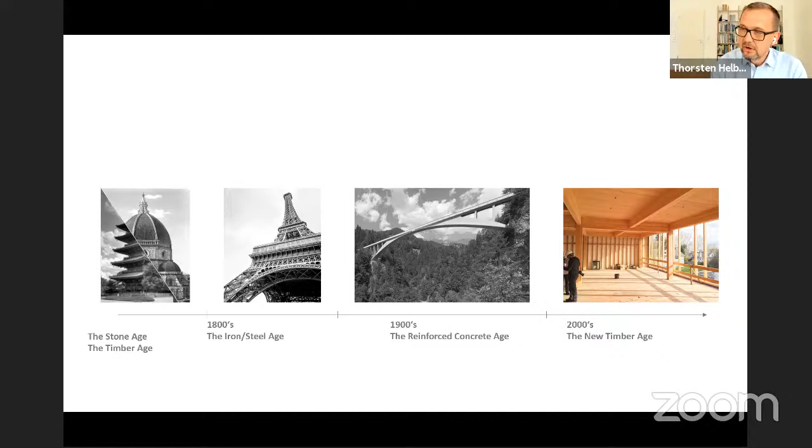And I claim, and we claim, that since the 2000s, the 21st century will be the new timber age. And I will talk about this now.

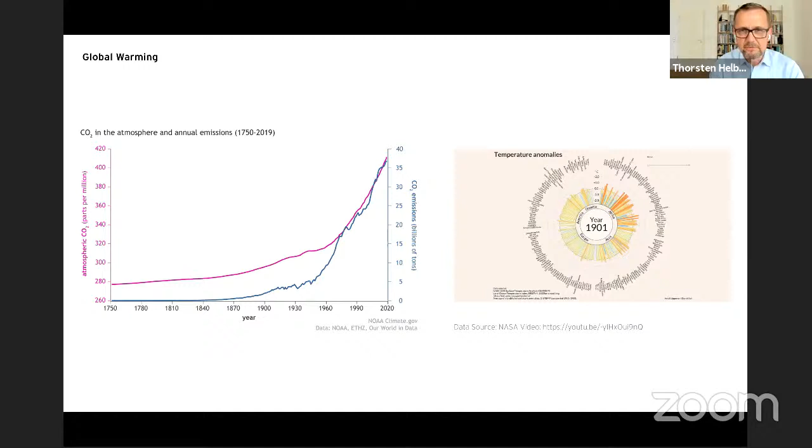So why do we work with timber? For sure, because of its strong sustainability aspects. I don't have to talk too much about this - everybody knows the global warming effects caused by CO2 and other emissions, especially since industrialization started 200 years ago. What we can already see are these global warming and climate change effects affecting all regions of the world, and we will see more of these effects in the next decades.

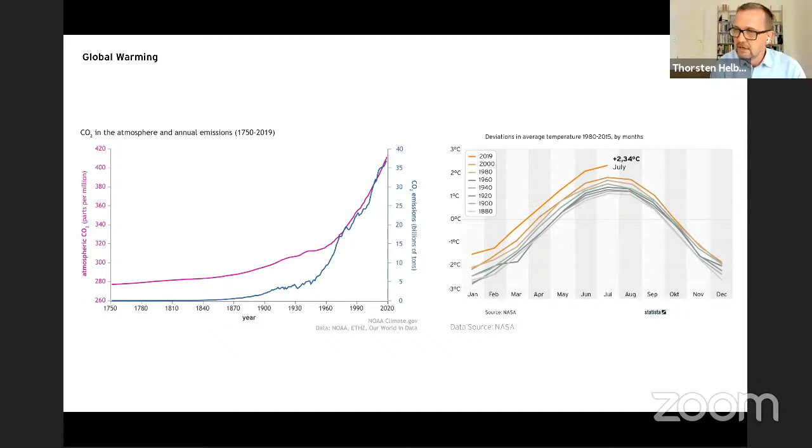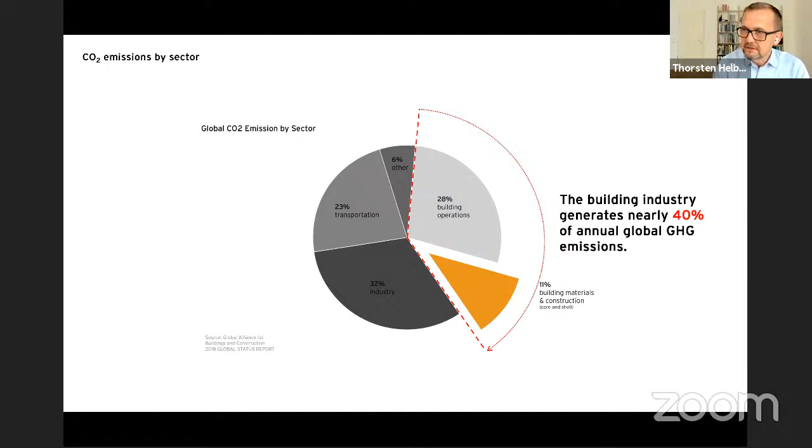When you think about the building industry, about 40% of annual global greenhouse gas emissions are caused by the building industry. Of this, 72% is caused by building operations - that means cooling, heating, and so on - and 28% is embodied carbon, the emissions caused by producing the materials we use for buildings. In Europe, we now think about 2045 for going down to zero carbon emissions, but that mainly addresses building operations.

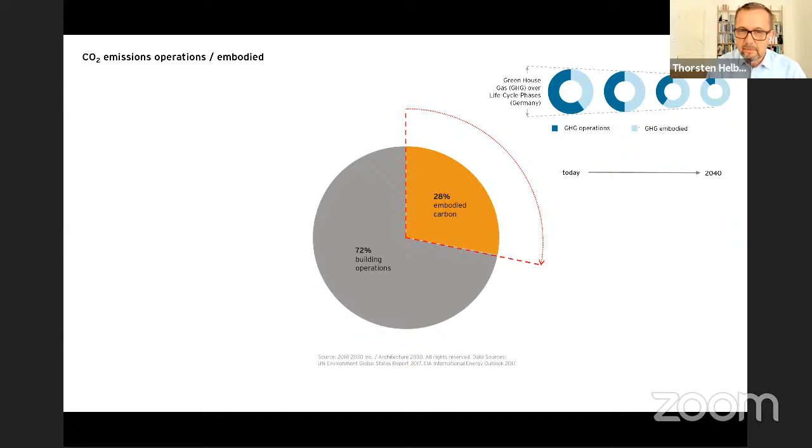But the material we use now will stay for much longer. That means the gray emissions we produce now with our materials will remain for a much longer time, even if we manage to use renewable energies for cooling and heating operations. So the aspect of material gets more and more important.

When you look especially at the division between structure and fit-out, or interior and MEP components of a building, about 56% to 60% of this embodied energy, and with that also the gray emissions, results from structure.

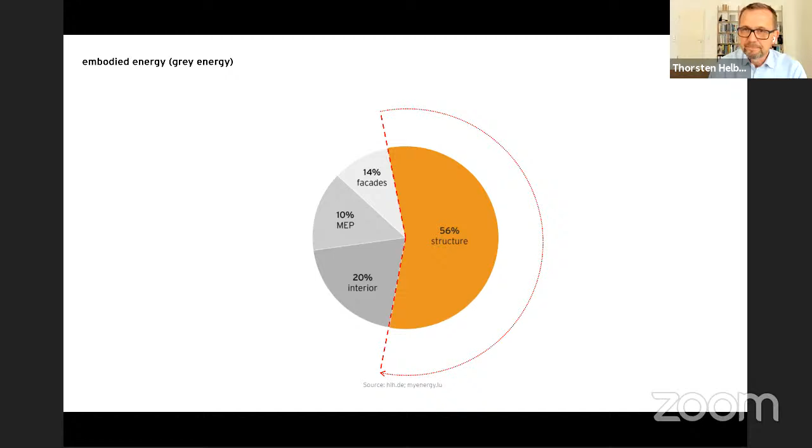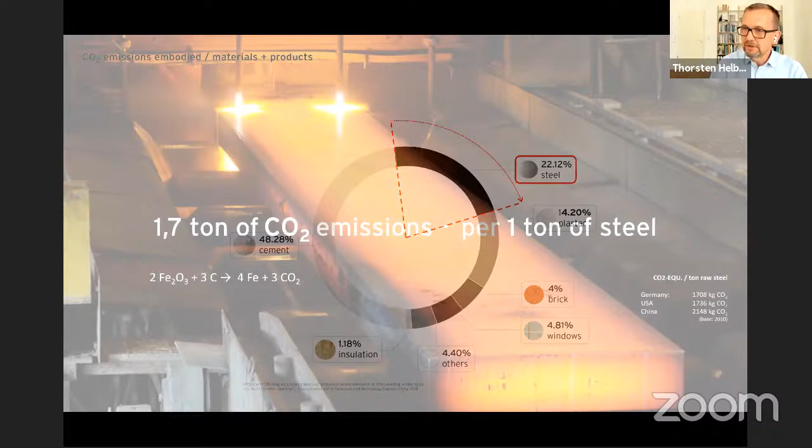And when you look even closer to understand what causes these emissions, you see that about 20-22% of these emissions are caused by steel used in buildings - that's a very general approach - and 48% is caused by cement.

So when you think about steel, it's a very simple formula you can look up in a chemical process. About two-thirds is the chemical process and one-third is the energy consumption during this process. At the end, you emit about 1.7 tons of CO2 per ton of steel - that varies a bit depending on whether it's in Germany, the US, or China, but that's roughly the number.

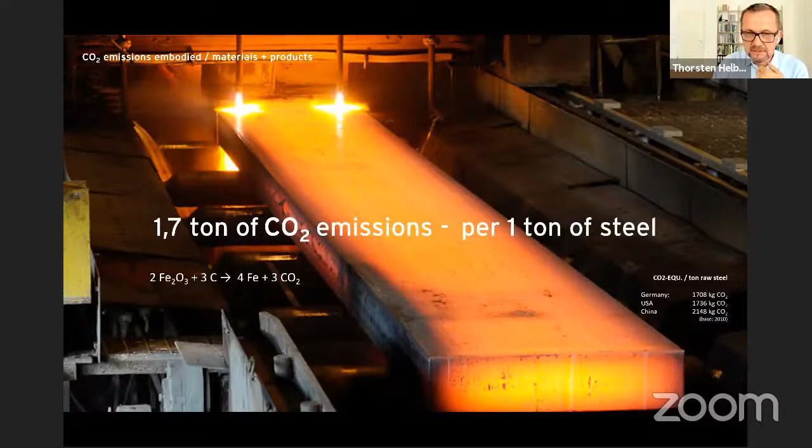Same for cement - about one-third of the cement emissions cannot really be avoided because it's due to the chemical process, and the other two-thirds are caused by the high energy demand needed to produce cement. About 0.8 tons of CO2 are emitted to produce just 1 ton of cement.

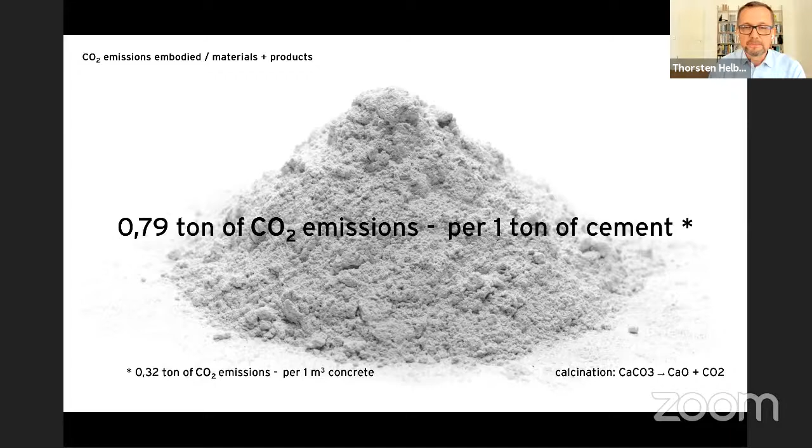So what could we do? To reduce these CO2 emissions, we could use a material which doesn't need to emit CO2 during production, but even absorbs CO2 during production. We could use timber.

What you see here is a simple formula we should all know: oxygen photosynthesis - how trees create material. They use CO2, water, and sunlight, and with that create the substance of a tree. There are simple numbers for how that works: 1 ton of CO2 is stored, or sequestered, in 1 cubic meter of timber, meaning in 1 ton of timber material, 2 tons of CO2 are sequestered.

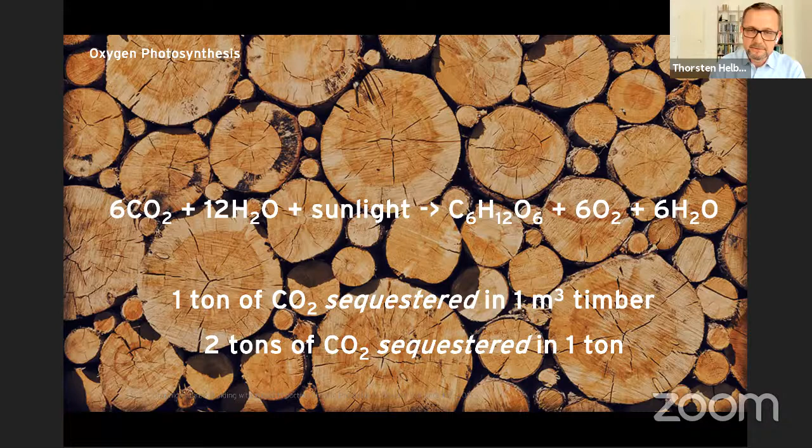Do we have enough material? Yes, we have enough timber in the world - about 30% of Earth's surface is covered with forests. This is a number we developed for our students in New York, showing how many hectares in the world are covered by forest - 4 times the US land area. Especially in Africa, mainly the Central African region and East Africa, we have enough sources for timber production. I've written down the numbers for Germany.

32% of Germany are covered by forest, but 52% of Tanzania are covered by forest. What is very important when you think about the production of timber, which we would look at now for a forest, is that you have to have a sustainable forestry. That means in all those countries, you can see on the right-hand side, the forest growth is larger than the harvesting of the timber, than the forest production. And that's very important. So to have a sustainable forestry, we would grow more trees than we would harvest.

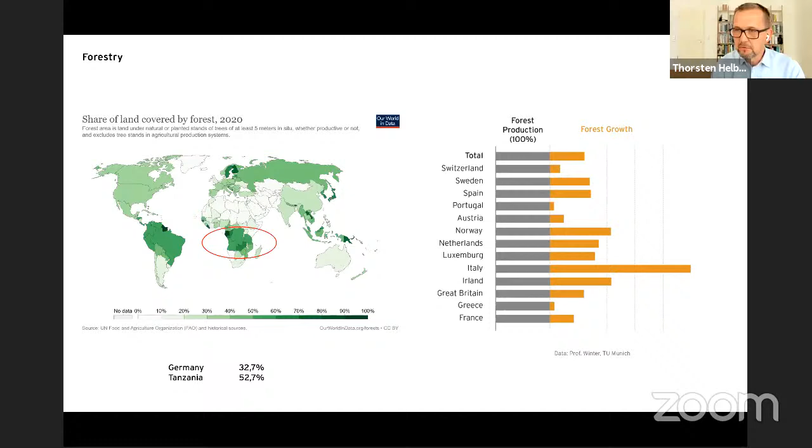Okay, now we have our raw product. We have timber. And what do we do with that? Now I want to talk about timber technology. In the past, we used timber more or less like this, like simple cut beams and planks.

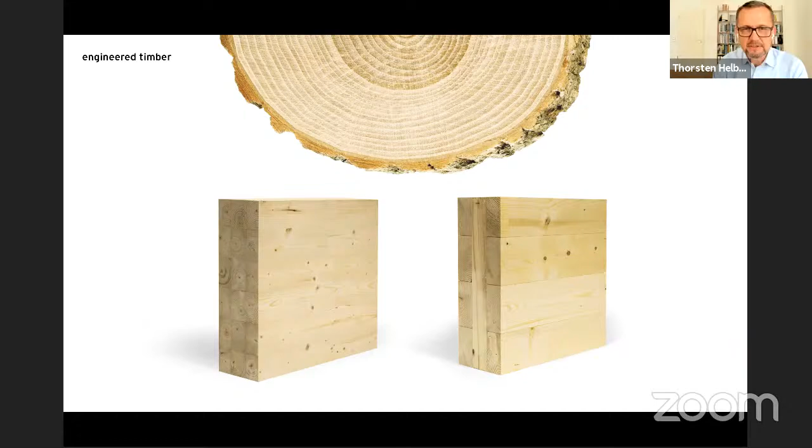In today's times, we use engineered timber, and engineered timber is mainly a product which tries to mitigate or reduce the typical weaknesses of a timber product, and we can see it on the next slide.

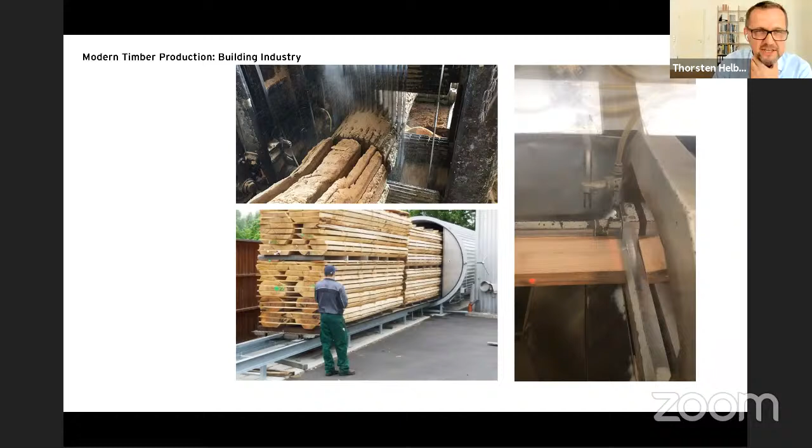What you do there, you take out the knots, the typical spot where a branch would grow out. In a tree, there's a kind of a small failure, so to say. And when you use the timber, you produce more or less endless planks, and you take out these mistakes, these little knots, and then you rejoin these pieces together. What it does is create an endless strip of homogeneous material, homogeneous in terms of parallel to the fiber.

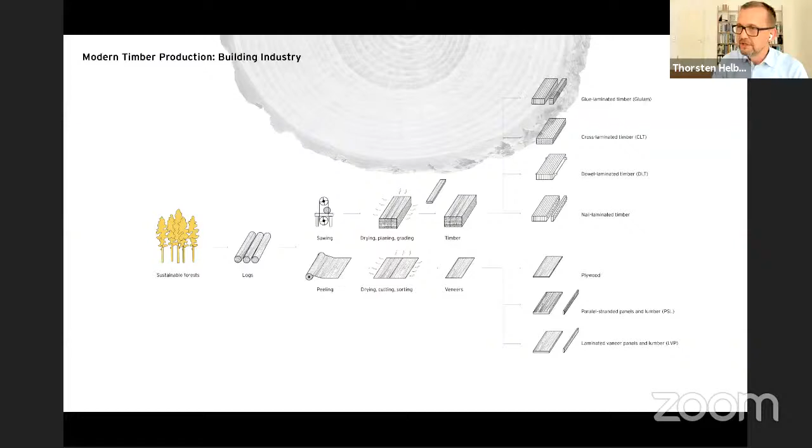And with that base material, you can create a lot of interesting timber products for an engineer. There are many applications, and the most common one, which we know already for about 100 years, is glued laminated timber.

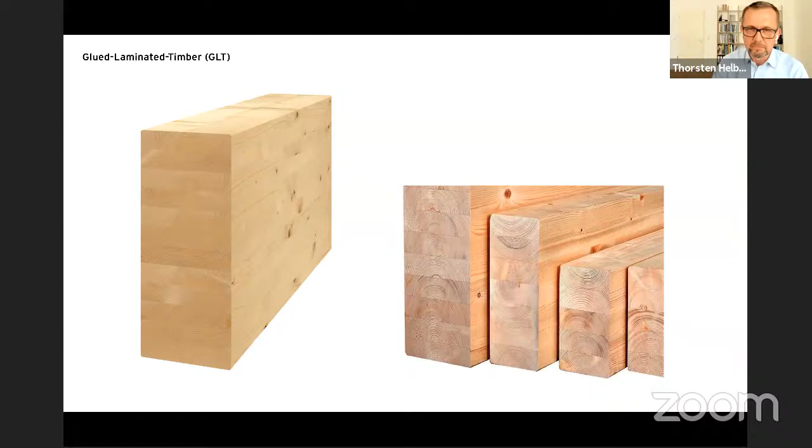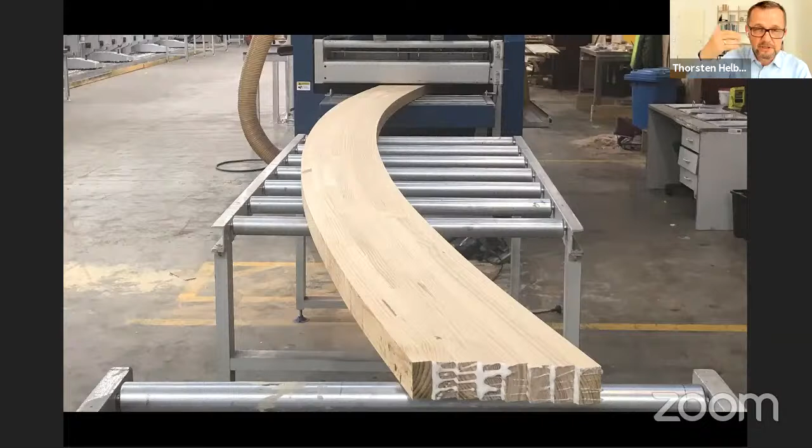That means we would glue several layers of timber together and create one uniform and more robust building component. You can bend this, you glue it together, and with this gluing process you also make sure that even if in one plank, one layer, there's a little weak spot, the other layers could take over. That means it's more of an industrial product in a way, but also more reliable than just a raw or cut out piece of a tree.

I think you all know this already, these typical glulam beams, which have been used a lot in the last 30, 40 years. You can see this in many applications already.

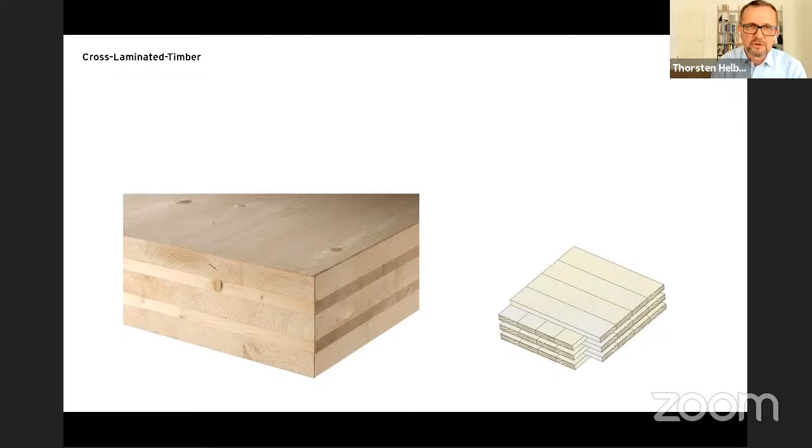The new thing, the interesting thing for an engineer to use in a structure is cross-laminated timber. Cross-lamination means it's not just oriented in one direction, with each fiber parallel, but you have it in a cross-laminated arrangement. And that creates a different and very interesting product.

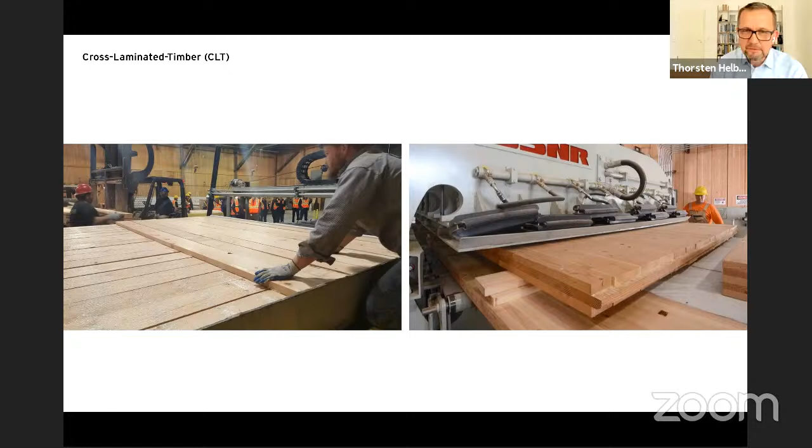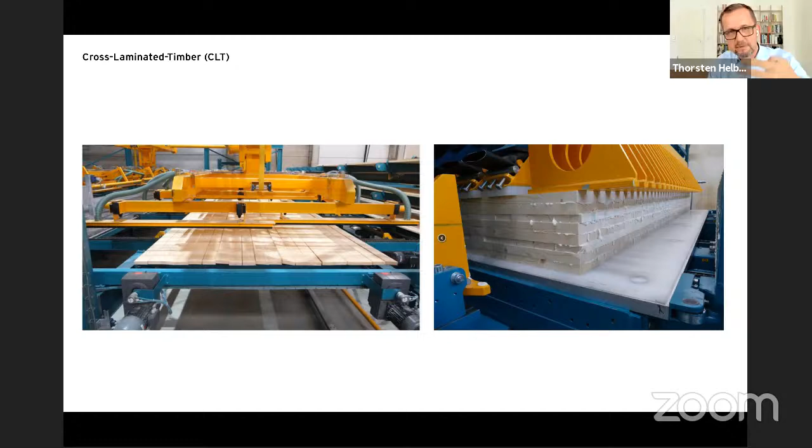Before I show you the advantages of this product, I'll show you how it's made. In today's time, this started about 20 to 25 years ago. It's now a fully automated process where robots and CNC technology have taken over, making it a very much industrial product.

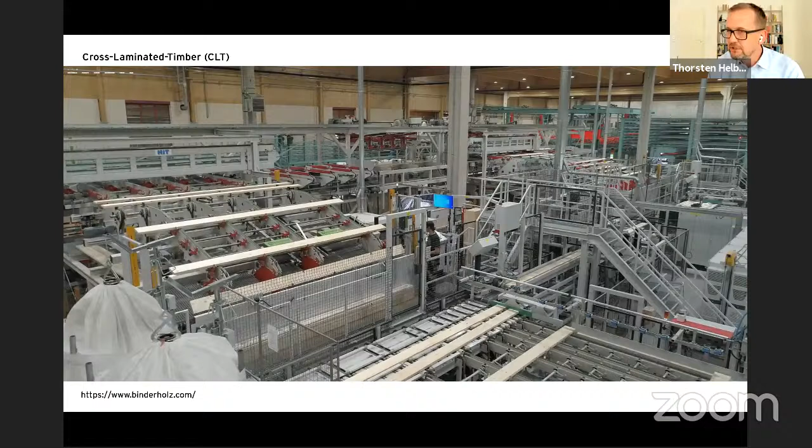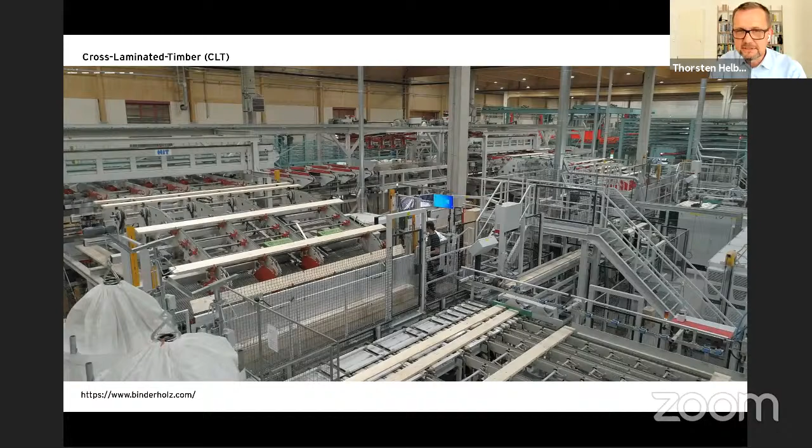I've taken screenshots from Binderholz's production line. You see here it's fully automated and controlled by robots, and that means the quality control and the assurance that you create a certain precision in this process is very high.

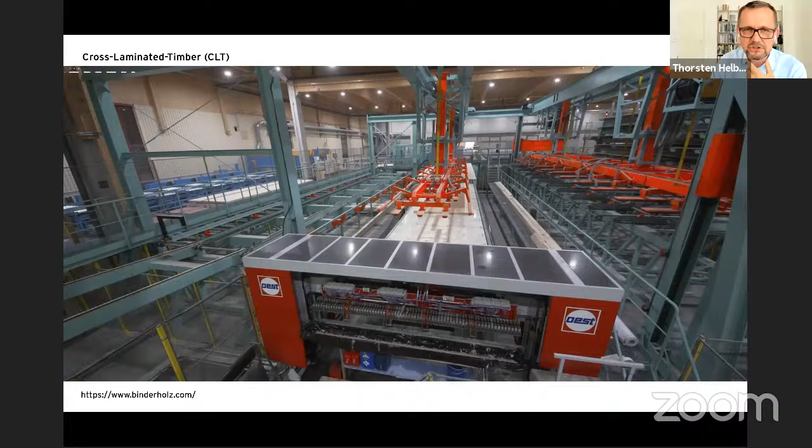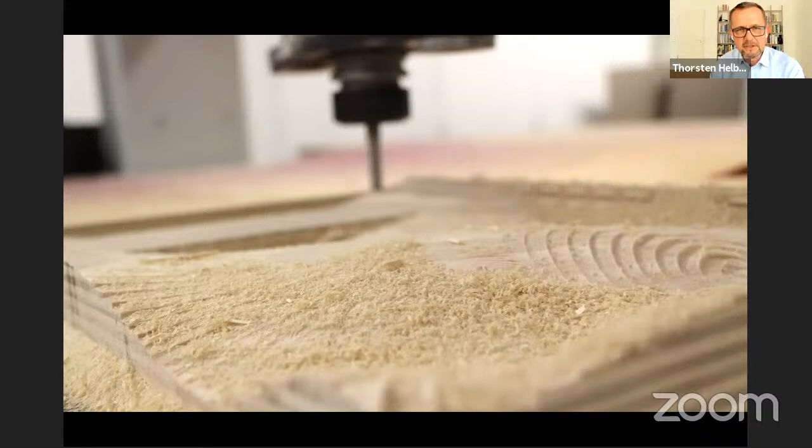Once you have created this product, which is an assembly of cross-laminated single planks, it's one uniform block, and you can then treat this block with the now available CNC technologies. That means you can cut, saw, and treat it in every possible way.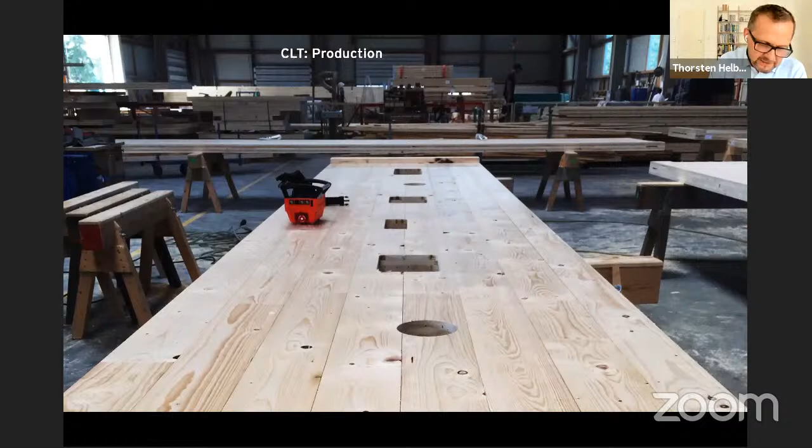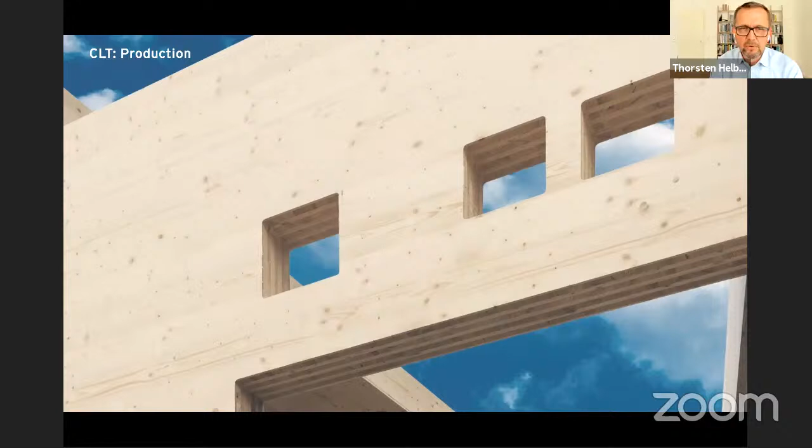What is the advantage of this? As in today's steelwork industry, you can work with very high precision. Each hole, each routing for piping and so on is very precise in its location. That means you can prefabricate components already in the workshop, and you don't have to adjust or recalibrate on site anymore. That takes away a lot of risk you would typically have on site, and makes the whole installation process much more smooth, easy, and risk-free.

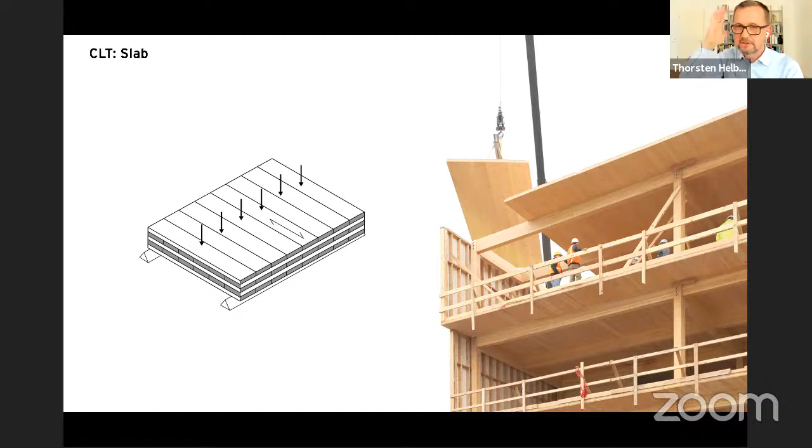Structurally, it's important that it can be used as a slab, a two-way spanning slab. Engineers would say it can span both directions, not just in one like a typical beam, but it can span in two directions, like a concrete slab which is steel reinforced.

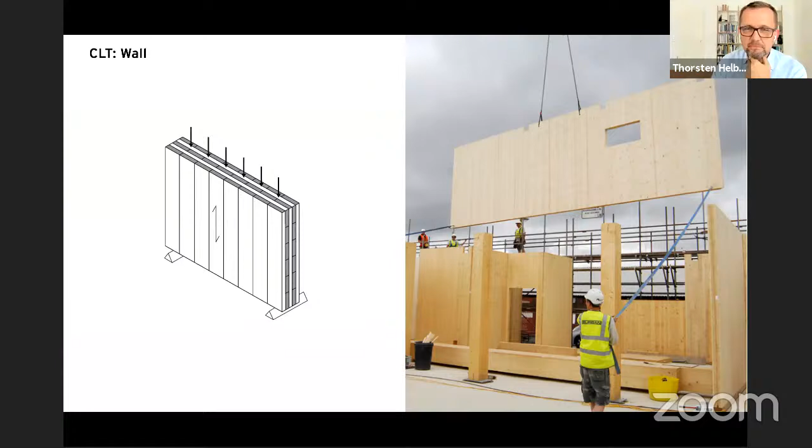But also you could use it as a wall system, because it has this cross-lamination. It means it's also, engineers would say, shear stiff, and that means it can also be used as a prefabricated and load-bearing shear wall system, even as a core system, so to say.

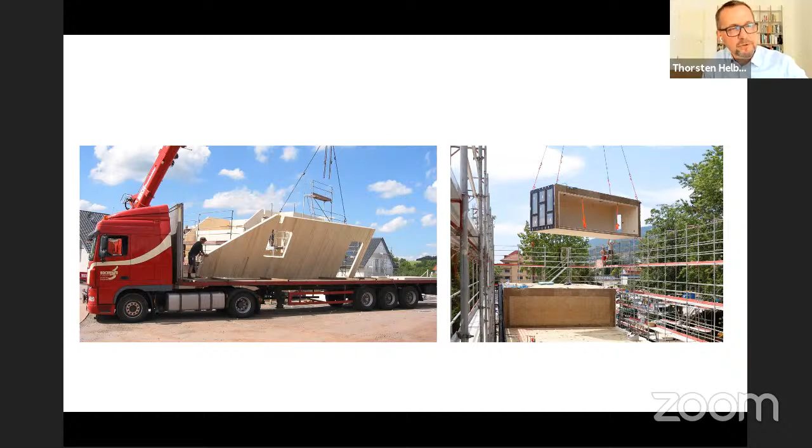So what about the typical things we have to talk about when we talk about timber? Timber and water, for sure. Timber is not like steel, it cannot corrode, but we have to make sure that even if the timber comes into contact with water, we control this. I don't want to go too deep into the theoretical aspects of this, but here's an interesting, very microscopic view of timber.

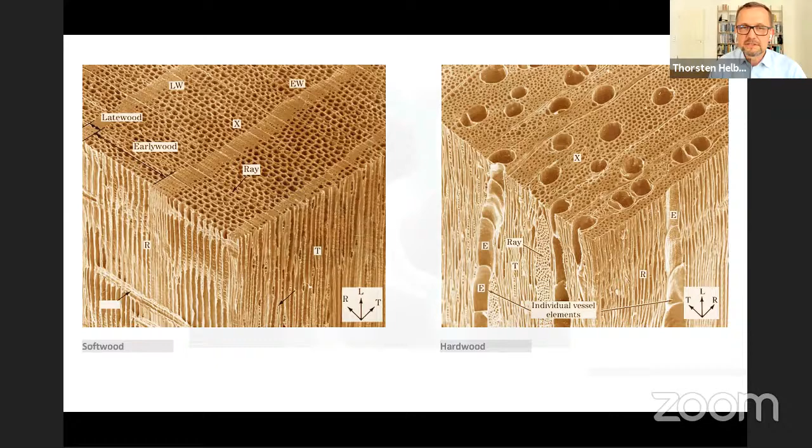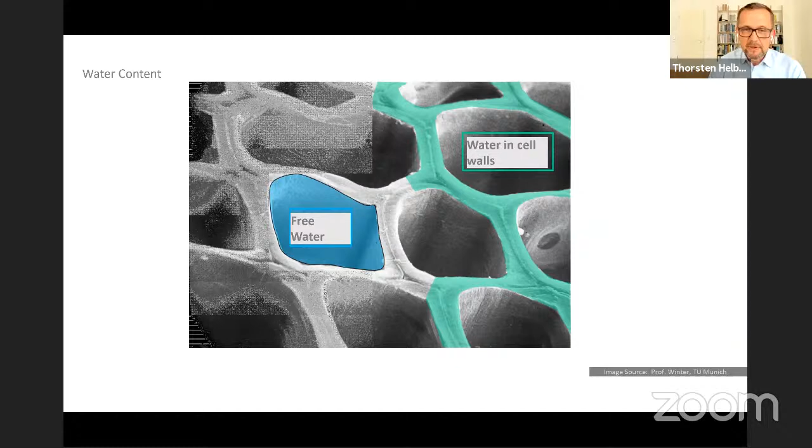How do you do this? It would mainly happen if you directly expose the timber to rain and to constant humidity. So there are rules to avoid this, and also you have to control condensation effects. So you have to be careful with timber, but it's absolutely manageable.

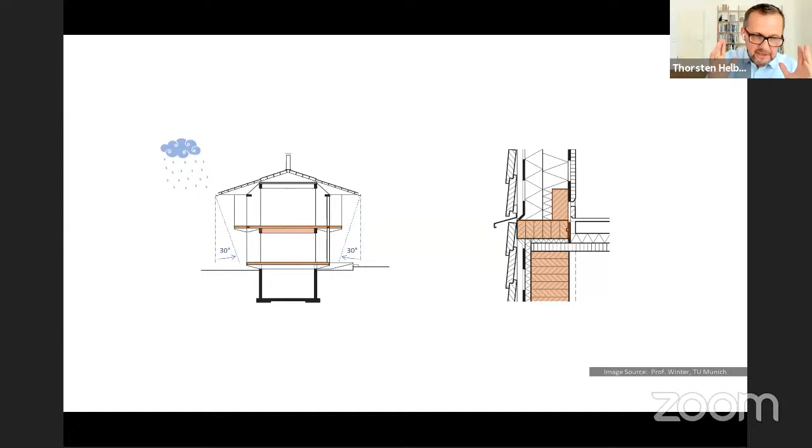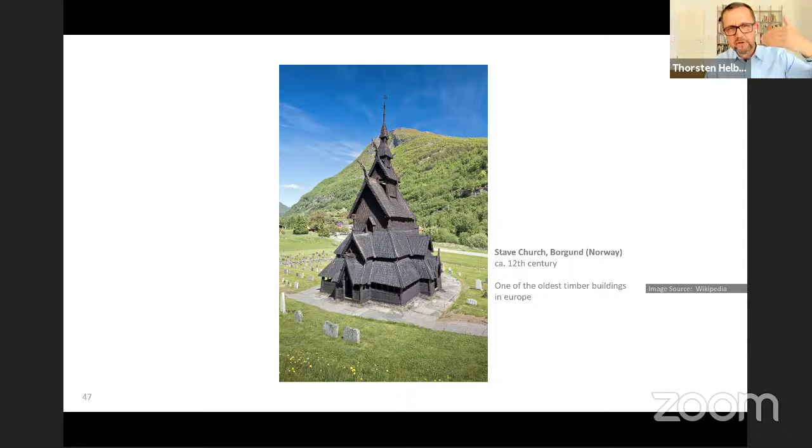I want to show you an example. There are buildings 700 to 800 years old already in the world, because in ancient times they knew about timber, maybe more than we know now, because they knew how to protect it and how to maintain it. In this stave church in Norway, built in the 12th century, they understood that they have a facade and a roof which needs to protect the inner primary structure. And that's the inner structure.

Since there's no water which comes inside the building, this timber structure can last more or less forever. This is now centuries old. You have to replace the facade if it's just timber shingles, but you don't have to replace the primary structure, because it's protected. There are other buildings, like half-timbered houses in Europe, which are 300 or 400 years old, and there's no degradation.

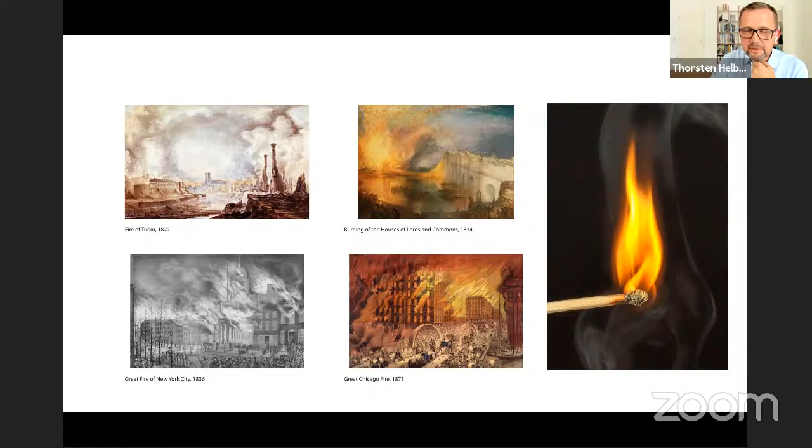Timber and fire. For sure, timber is combustible, as we all know. We all know these stories from the past where huge fires in big cities created huge damage and losses. So the interesting aspect of timber is, yes, it burns, but it doesn't lose strength in the part which is still intact. That's a difference compared to steel, because steel loses its strength due to heat, and it would bend more and more. You see this example comparing a primary structure out of timber and one out of steel.

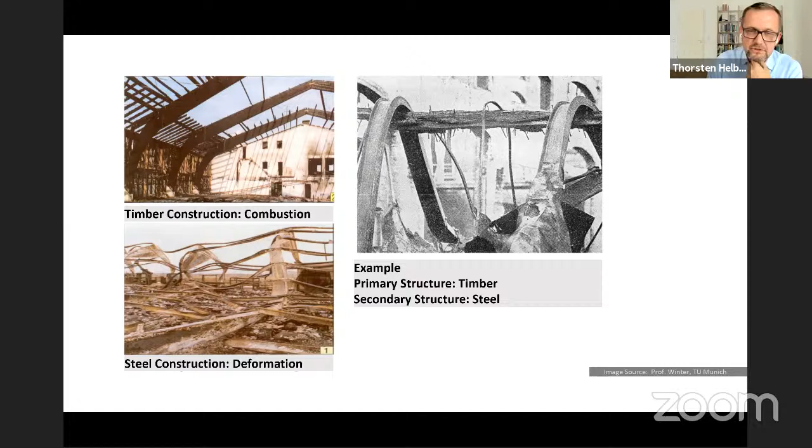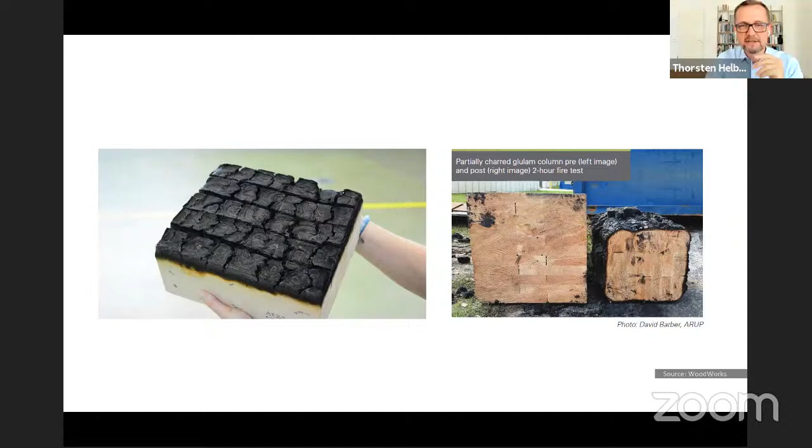What we hear from our fire brigades here in Germany and in the US is what they like about timber: they can actually see what is happening. You see what is burning, and you can imagine that there is still some remaining structure there. Especially with this mass timber approach, where components are bigger and more massive, you can easily calculate how much of the bearing member would still be there after a certain burning time. So we now calculate, and this is code in many states and countries already, for 30, 60, or 120 minutes, how much of this cross section would remain intact.

That's very interesting. This approach is now the code base for many countries already in Europe, but also in North America.

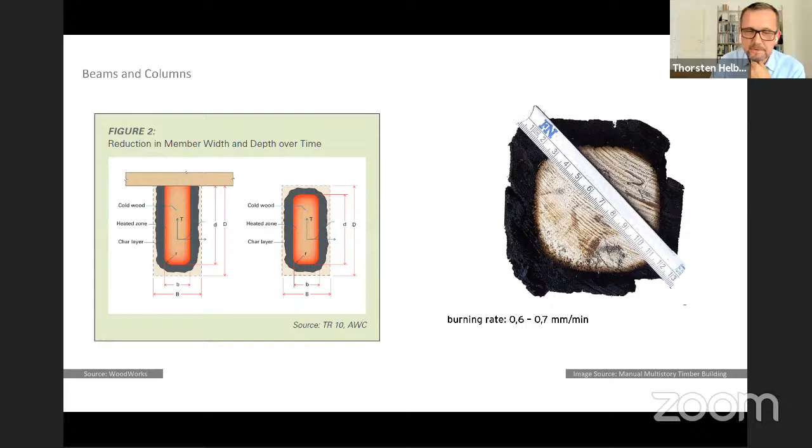That means the heaviness, the solidity, or having massive members helps a lot to increase the fire resistance of a building. You can imagine on the left-hand side, light wood construction, which is more traditional - it's much more risky if there would be a fire, compared to this mass timber house on the right-hand side, which would last for much longer. It's like a campfire: you need little sticks to light the fire, not massive pieces. That's the simple basis for this approach.

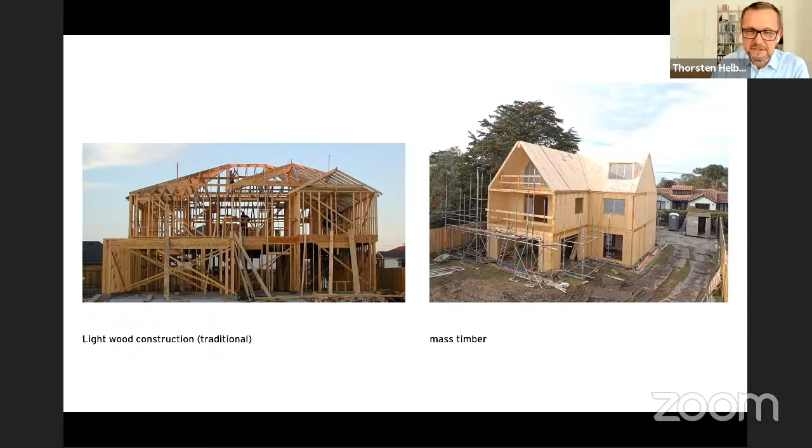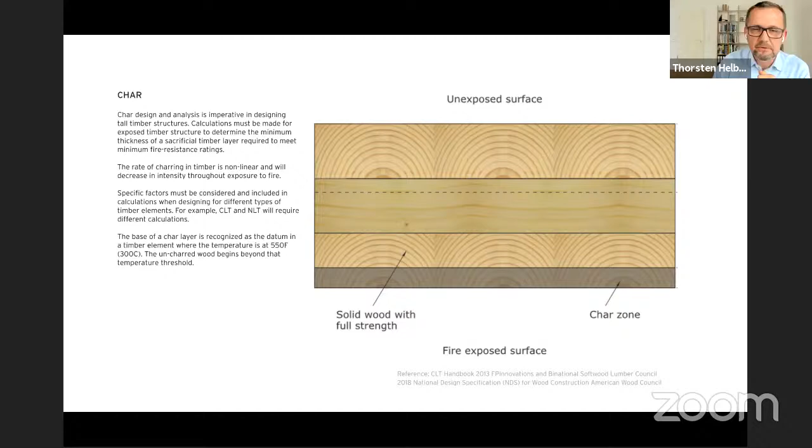There's much more to say about this, but the char zone actually insulates the remaining structural member. That's the theory, and that's also what has been tested several times all over the world, finally leading to this new code generation, which now allows for many more applications of mass timber - not light wood construction, but mass timber constructions for multi-story buildings.

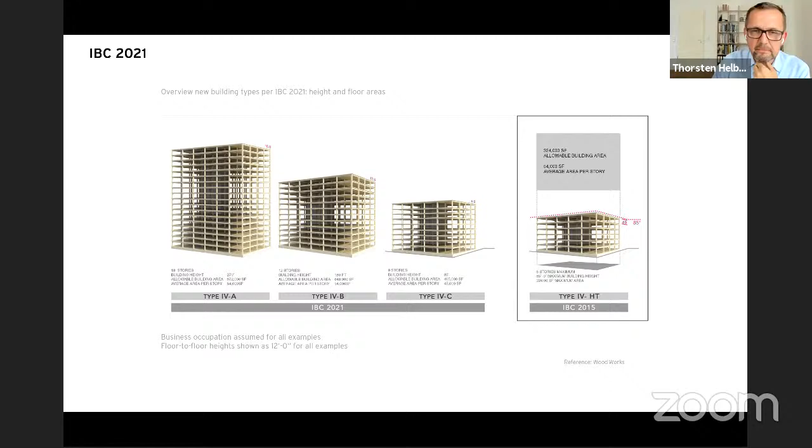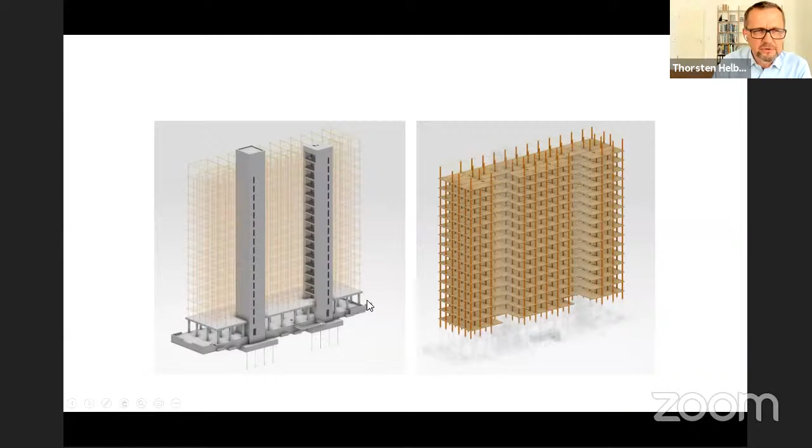I want to show you two mass timber applications. One is a student dormitory in Vancouver, Canada, which is at the moment still the highest timber tower. It's actually a hybrid - part of the tower is made in a more conventional way. The core and the plinth are made out of steel reinforced concrete, but all the other levels and the dorms themselves are made as a timber structure.

What you see here is that first the steel reinforced concrete structure is installed and erected, and then in the next step the prefabricated timber components are erected. An interesting number I've heard is that each level took 1 week with 6 installers - a very fast installation process because it's a very high precision prefabrication method, and on site you don't need to adjust much anymore. You just stick it together more or less.

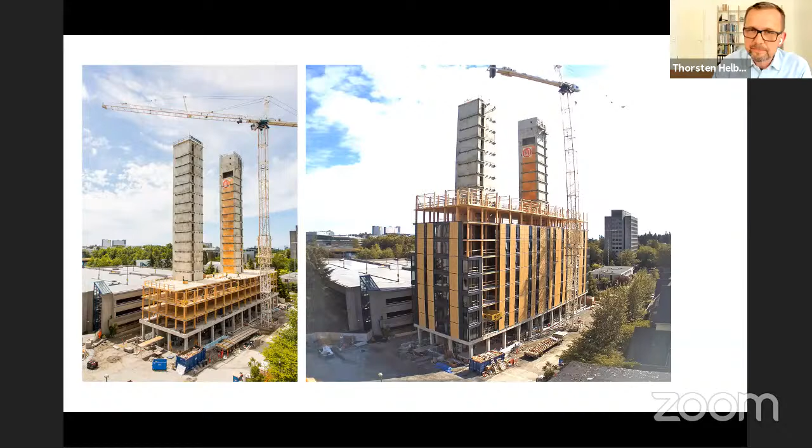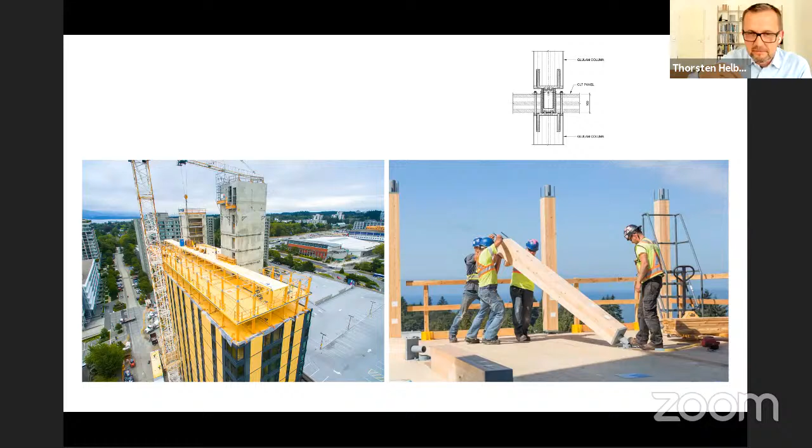Here you see how it's done - interesting details. For an engineer it's really amazing to see how all those components come together on site, allowing for a very fast track and minimized process with minimized risks on site. Here you see some examples of how that looks. There's many new applications and inventions for this new mass timber approach, and I think we'll hear much more about this in the future.

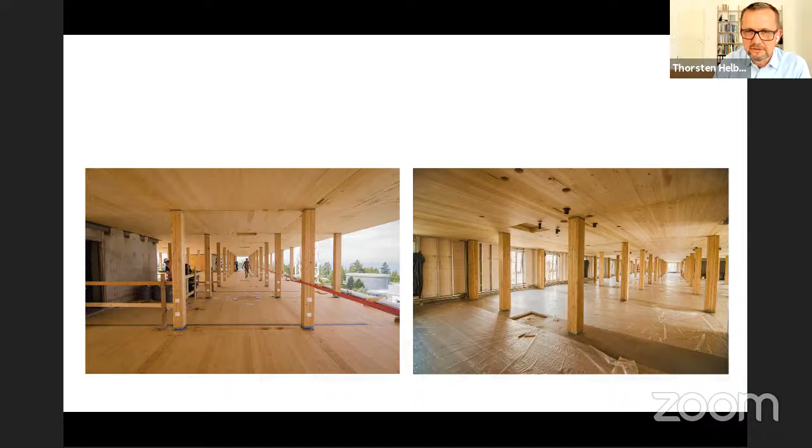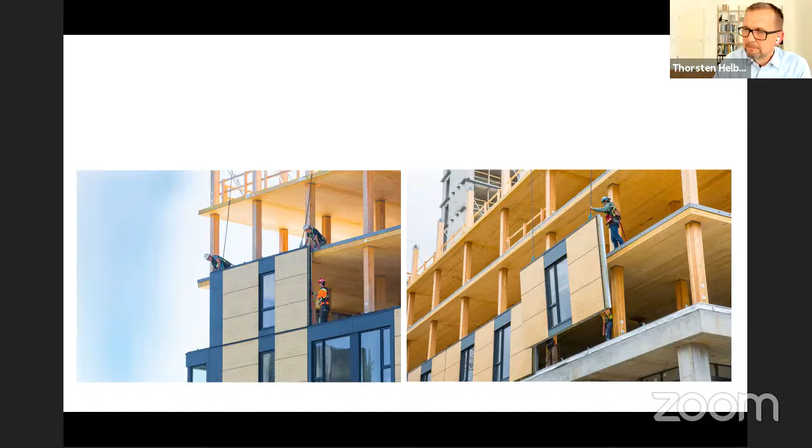Obviously, a key is also prefabrication - everything is prefabricated and just installed on site. The advantage is that in the workshop you can much better control quality. It's under controlled conditions - there's no rain, there's no heat in the workshop. You can control these conditions, and the specialists always work on the same task, so you can really control quality and time.

One more project, just built 2 years ago in Vienna, Austria - it's a tower, also 84 meters high, 24 stories. It's more or less the same principle: there's a kind of core made out of steel reinforced concrete, and then the levels or stories are made out of mass timber.

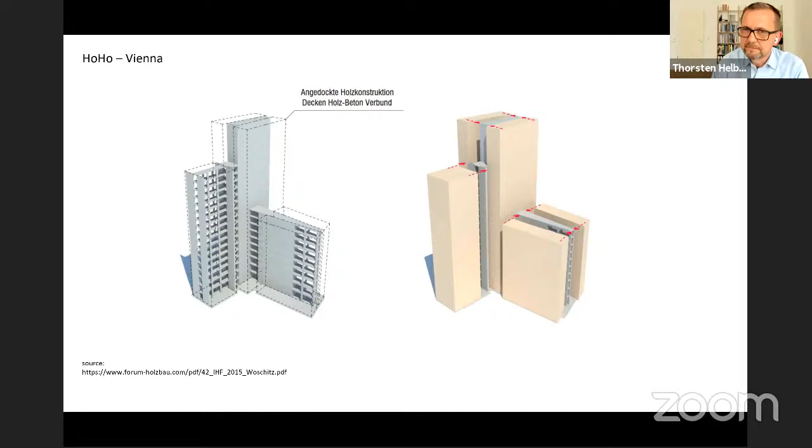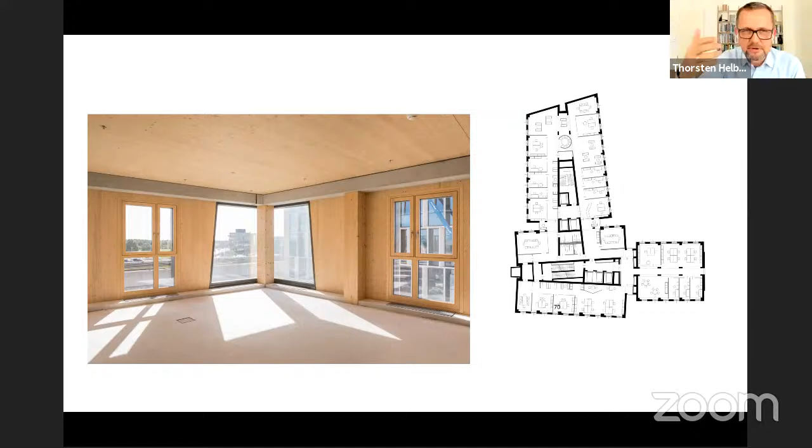You can see how it's built, how it's brought together, and then finally, in a further process, how much timber you can expose later on, or how much you'll probably cover - that's something you always need to develop in the design. But finally, that's the product for this tower in Vienna. There's offices, but also a hotel area, and some stories are used for residential, from what I know.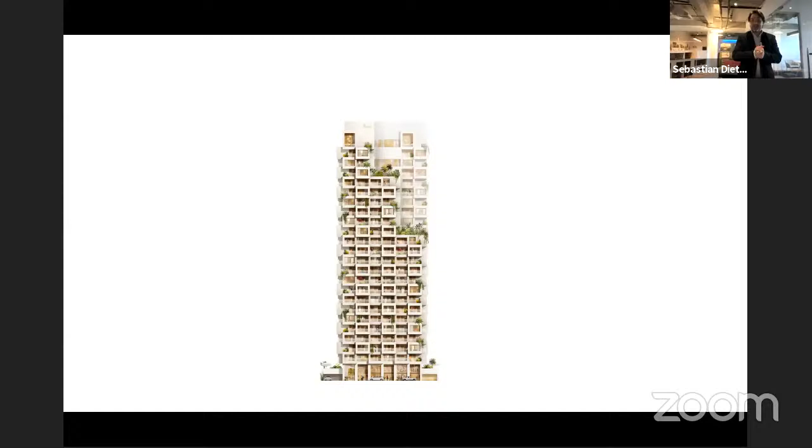Thank you, Thorsten. Thank you for this very, very interesting and exciting presentation, but also to see the way we build today, if we continue doing that in terms of carbon emission, we will not be able to rescue our planet. So I think there's a lot of reasons to think about new building technology, and thanks for sharing your experience about mass timber.